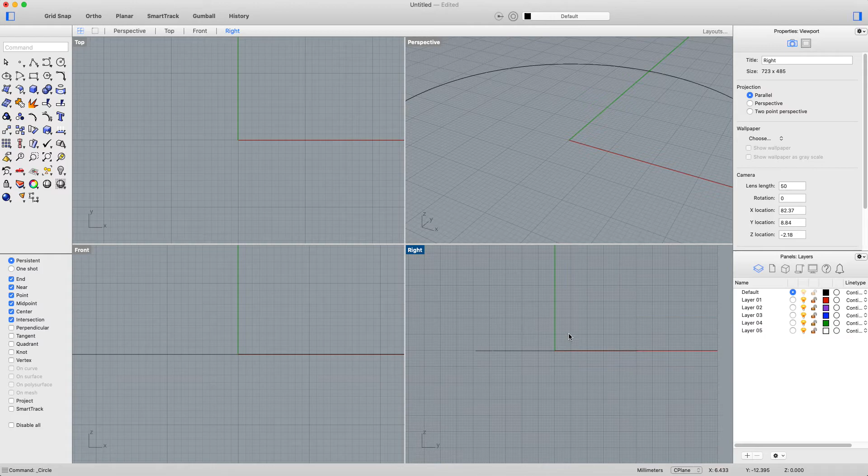So I'm going to start with a circle to give me my basic size. I'm going to draw it in the right hand view because it's the side of the wheel that I'm going to be drawing. And I'm going to draw my wheel at 100 millimeters big, so 100 millimeters diameter or 50 millimeters radius. Oops, that didn't work. Try that again. Okay, so there is the side of my wheel.

And what I want to do is create some spokes in this, and I also want to create a tire around the outside. So one of the tools that I'm going to use in this is called offset. Offset is moving a curve or a surface away from another curve or surface.

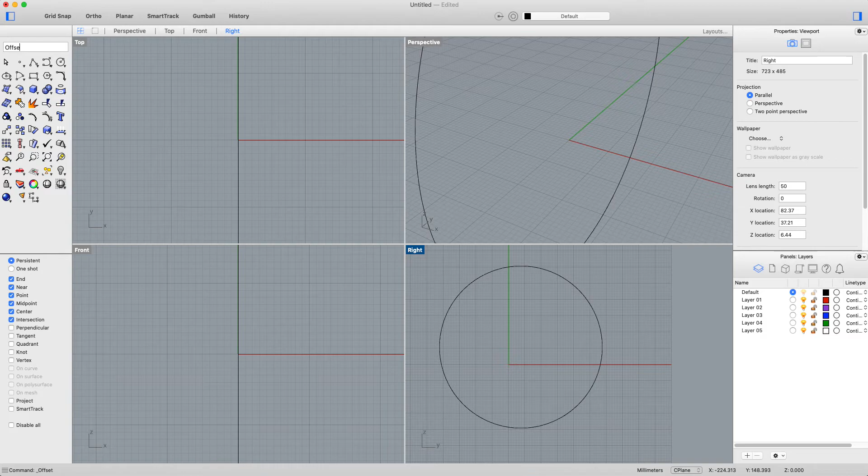Offset is in here, I think. Offset curve, okay, or you can just start writing offset, it will come up. Click the curve that you want to offset and then tell it how far you want to offset it. So I'm going to go for 5. You can see now when I move my mouse I can either offset the curve inside or outside. So I'm going to offset a curve inside to start with.

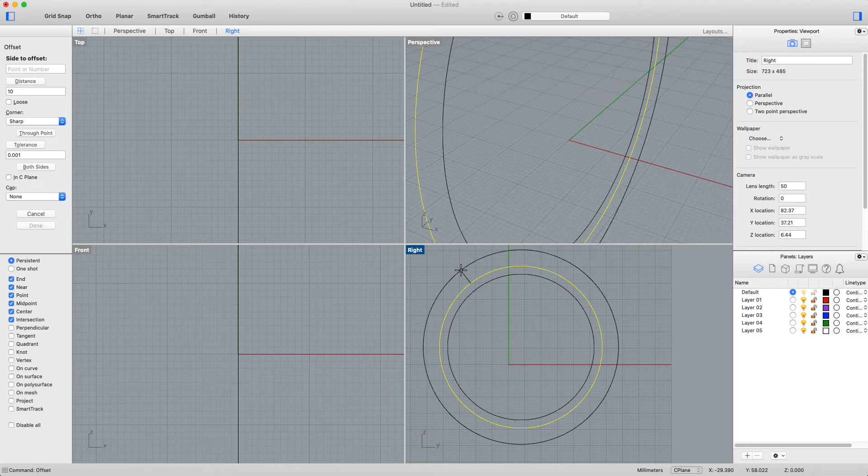So this is going to be the edge of my wheel. I'm then going to offset another curve out from here, which is going to be my tire. So I can either write offset again or I can just hit spacebar to repeat the last command. Spacebar, click here, and then I'm going to make my tire a little bit bigger. What does 10 look like? Nope.

Okay, so in between there and there is going to be my tire. In between there and there is going to be the outside of my rim. I also need a center of my rim. So I click here, I come down here, and if I move my mouse near the edge of the circle it bounces to the center. So I click, and I'm going to reckon that the inside of my wheel should be, say, that big. Then I need to draw some spokes in here to create a joining bit between the inside of my rim and the outside of my rim, which is between here and here.

So we can either draw a straight shape from the center of this, up, okay, and I can either have straight edges of my rim, which I'll show you first.

So once we have drawn one line, we come over here and we find this tool here, which is an array tool. If you click and hold, there is either rectangular array or polar array. So what we're doing is a polar array, which is spreading objects around a pole, like the North or the South Pole. The pole in this case is the center of your rim.

So you click this, and it asks you for the center. Well, sorry, I should deselect everything first. If I click this, it asks for the object that you want to array. So this is the object that you want to array. Press enter, and then it asks you for the center of the array, which is here.

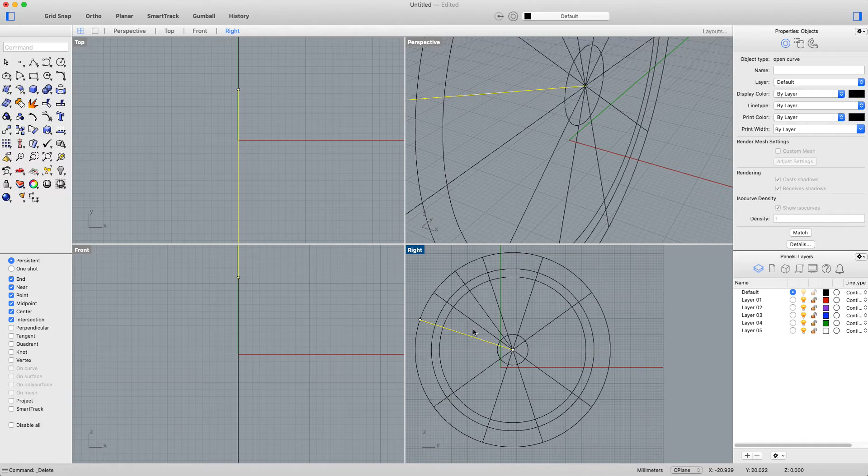What I would then need to do is go ahead and delete the ones that I don't want. So this is one of my pieces. I'm going to delete every second one, all the way around my circle. Okay, so then I would be able to create a wheel using this shape.

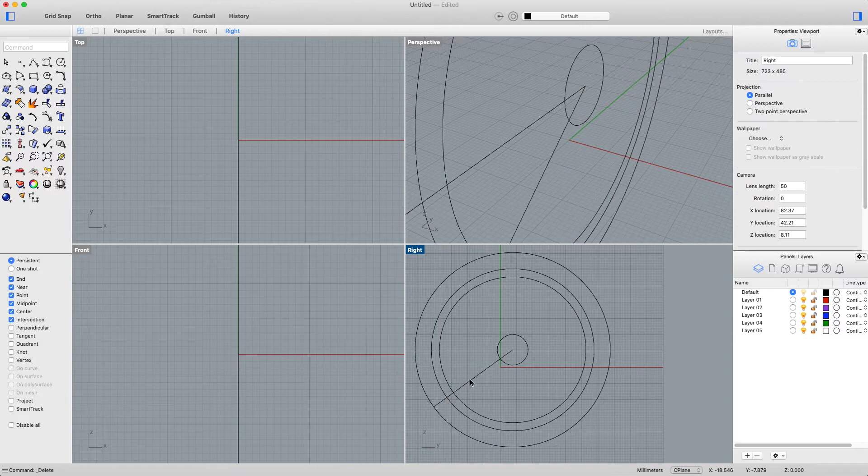I'm going to try and make it curvy, make it a little bit more interesting. So instead of doing straight edges, what I'm going to do is get rid of all of this, and I'm going to draw one curved line.

Using this tool here. I'm going to start in the center, click out here, and then click. I'm going to hold down Alt because I don't want it to bounce on things. So I'm going to give it a bit of a shape like that. Okay, it doesn't matter that it's a bit long, we'll fix that later.

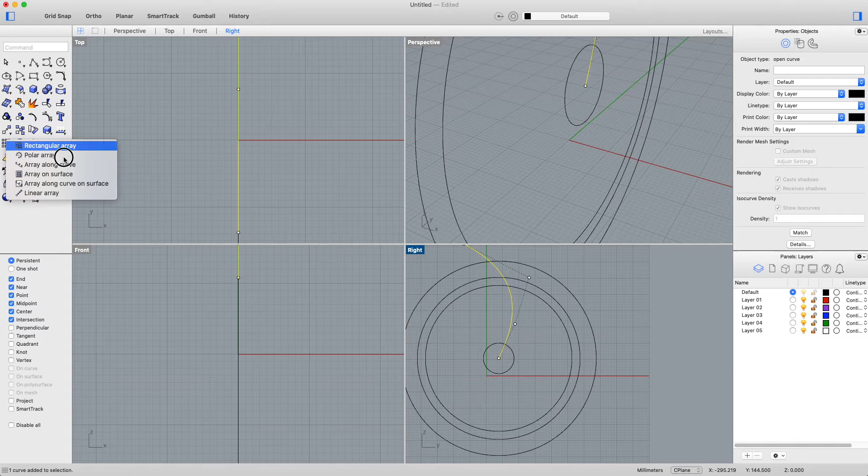Then I'm going to get this and I'm going to array it, and do 20. Wow, that's pretty intense. So we actually only need to draw one part of this rim, and then we can...

Oh no, we're going to do it the long way. So I'm going to get rid of all of these.

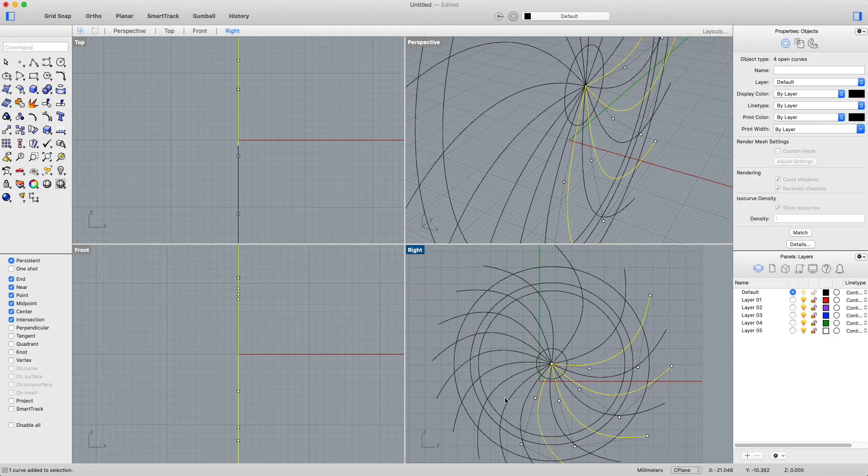Okay, so this is going to be solid, this is not going to be there, solid, not there, and so on. We need to create the surface coming out from here, round, and back into here. So what we need to do is split this guy.

Split is not there... split must be in here. My gosh, I can't remember where it is. We're just going to write split. Okay, split, and we want to split this, with all of these shapes in here. Press enter when you're done, then select all of these.

I don't want that piece, that piece, that piece, that piece, or that piece. So my rim is going to come up through here, round here, back in here. Then I have to get all of these, and split these as well. Split, and I want to split it with all of these shapes.

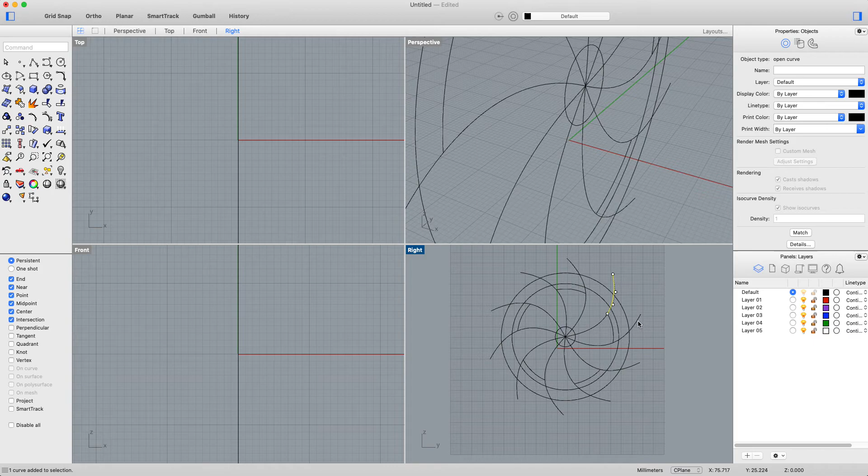Now I have a bunch of shapes, and I need to delete all these ones. My wheel's starting to take shape. So the rim comes in here, and then it needs to go across here and back out here. Same as what I did with the outside, I need to split the shape

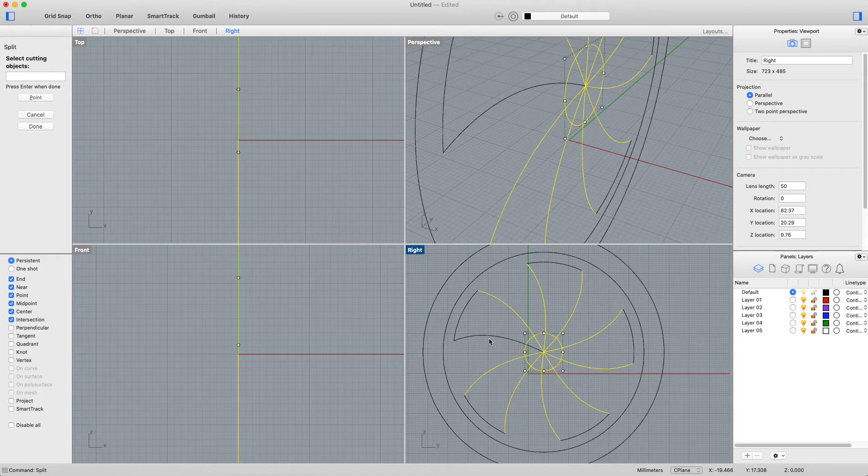with all of these. And I need to get rid of this, this, this, this, and this. We're nearly there. Then I need to split these shapes.

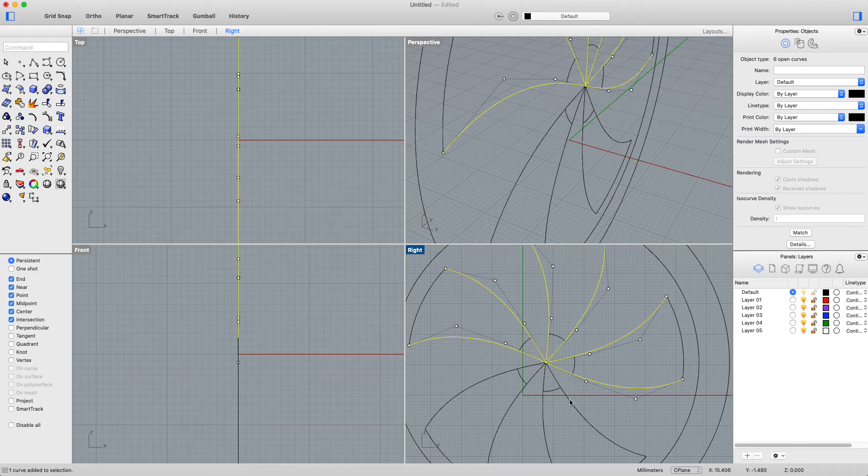It's probably easier if I make this a bit bigger for you, isn't it? So I get all of these shapes, and cut with these shapes. All of this stuff in the middle I delete. And so now I have this rim in here.

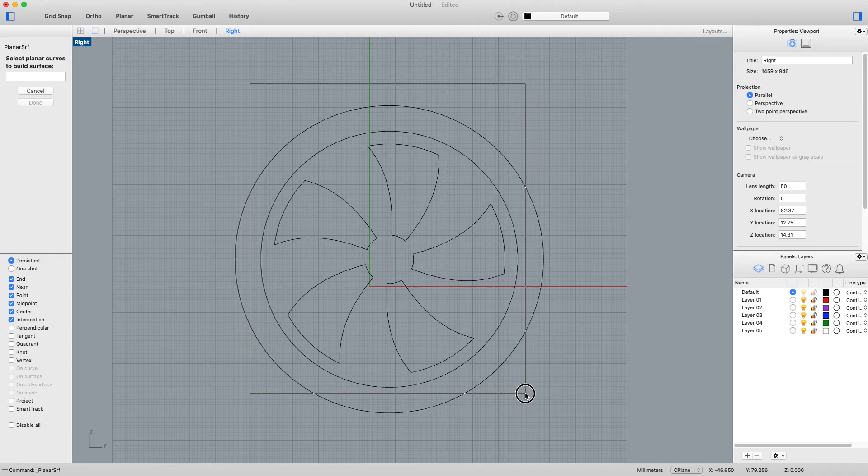That was an awful lot of splitting we needed to do. But now that I've got this all made, I can make my planar surface, which is what we did in the last video. I just have to be careful which curves I select. I want to select everything apart from this shape out here, so I'll drag a box carefully so I don't get that outside circle. Press enter. If I minimize this.

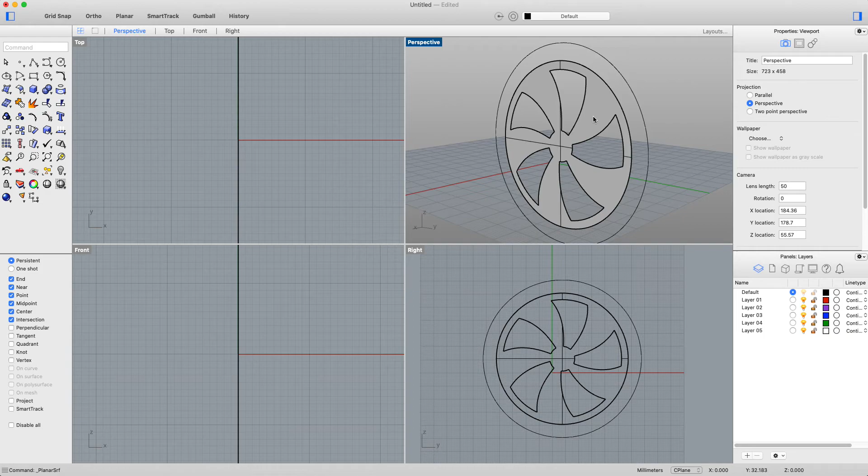Turn shaded on, so you can see that I have a rim drawn in here. I'm going to push this out sideways to make it thick, so I'm going to extrude this. I'm not going to extrude it very far because I don't want my rim to be too thick. So I now have the rim here.

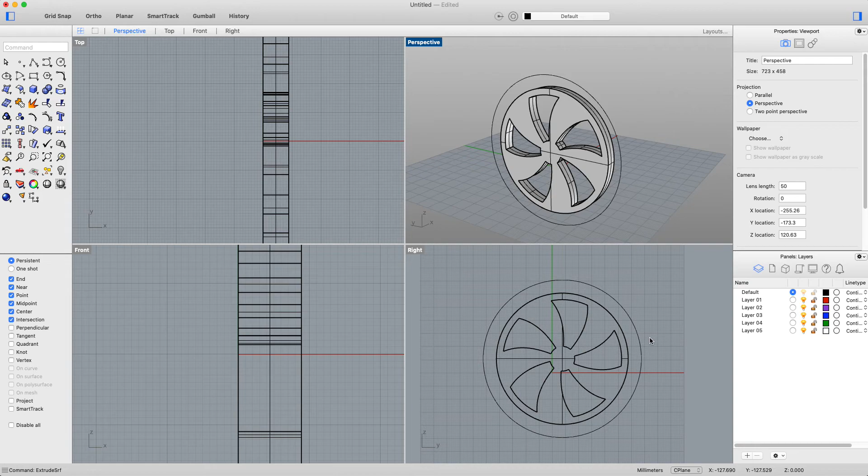Then I need to draw the tire. I need to draw a planar surface for the tire. I'm going to turn this shape off for a bit so we can see what we're doing more easily. I moved it to another layer and turned the layer off. I don't need this planar surface anymore, so I'm going to delete it.

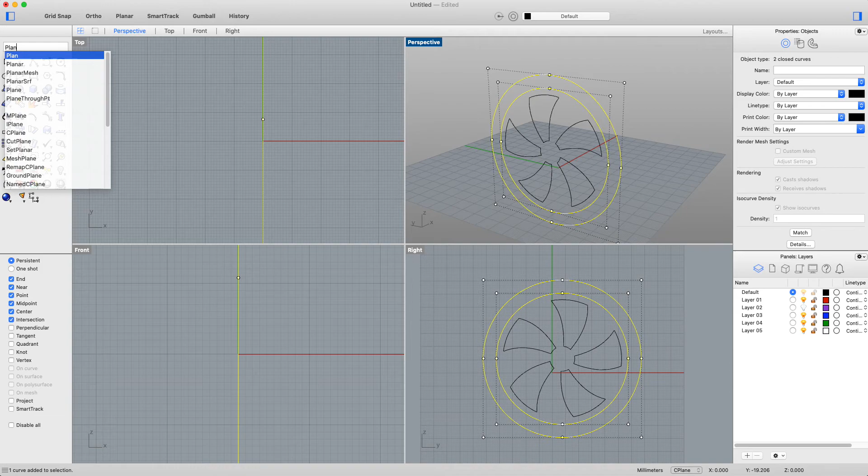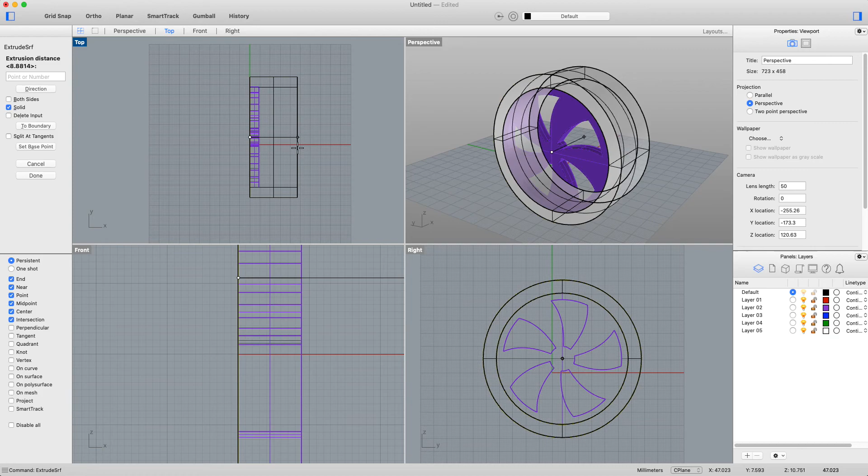Then I'm going to make a planar surface between these two shapes. I'm just going to write planar surface. Okay, then I have the edge of my tire. I'll turn this back on to see how far I want to push it. Extrude surface. Obviously I want my tire to go a little further than my rim, about that far.

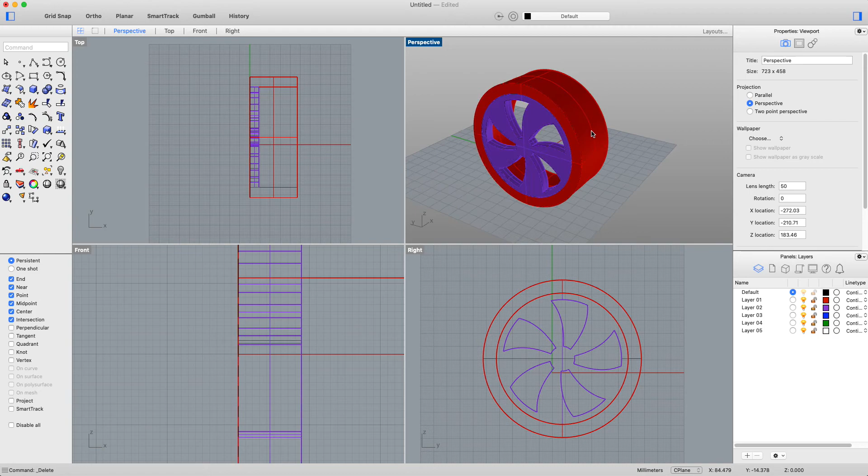I'll put this on a different layer so you can see it. Turn that off for a second. Delete this, don't need that. Turn my red one back on. Then I have a nice tire and a rim. Obviously, if I was going for full realism, I would need to draw the rim coming inside this side of the tire, but I don't think for what you guys are doing you need to do that at the moment.

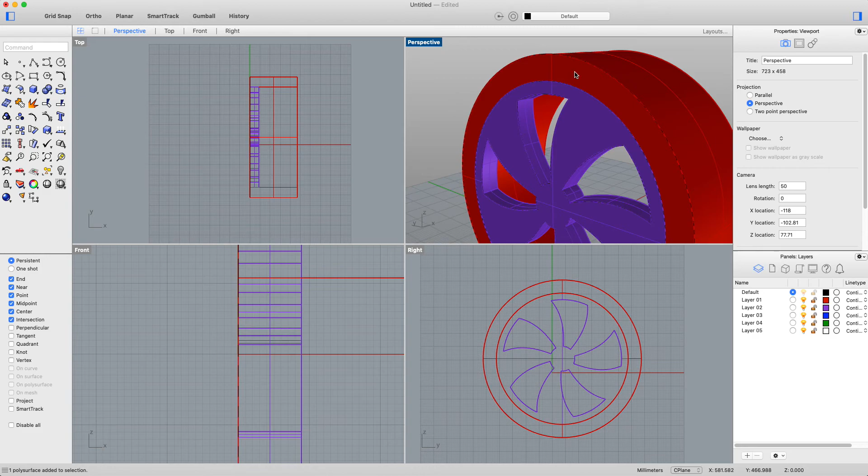One last thing you could do: normally a shape doesn't exist with a hard corner like this on the edge, so you can what's called fillet the edge of an object. In the solid editing tools, you can go to fillet edge, or just write fillet. There are a few different kinds of fillet, so this is fillet edge.

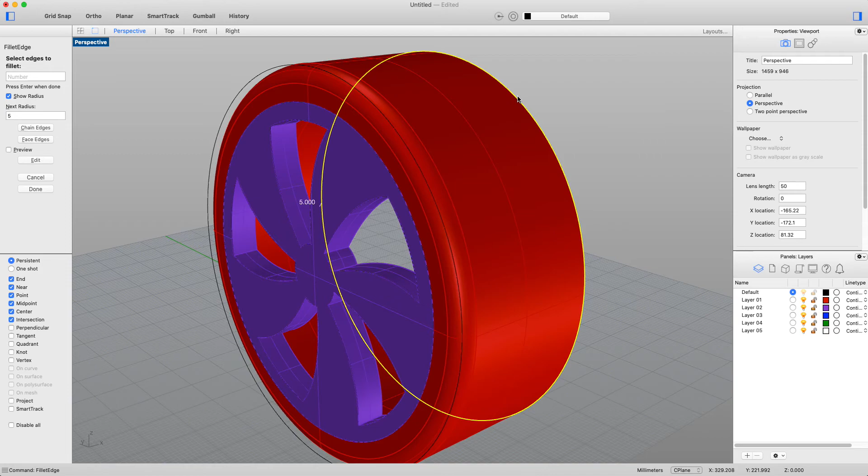You need to decide the radius, so I'll show you a reasonably large radius to start with. Then you click the edge, press enter again, and it smooths the edge of the tire. That actually looks about the right size. Then I can do spacebar to do it again, click the other side, and now I have a tire that's rounded at the edges.

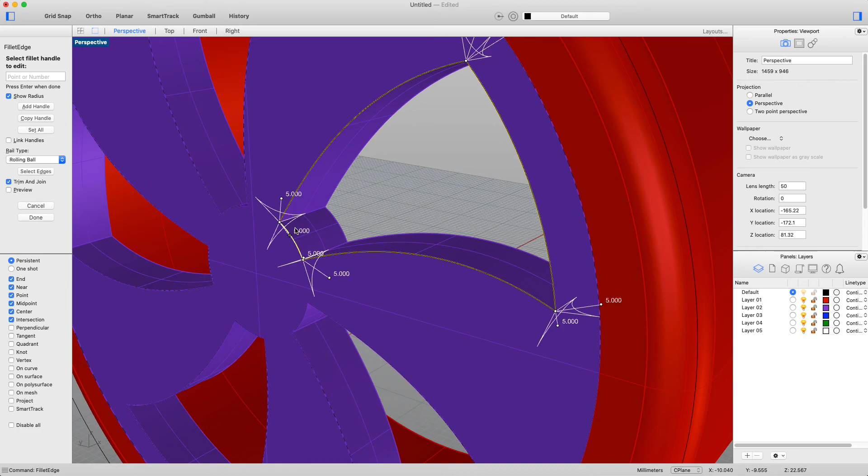You can also do that with the parts of your rim. Say I wanted to do this edge here. Now this may not work because 5 is quite big to get around this corner. So that's what it looks like when it doesn't work - that fillet was too big for it to work out.

So I'll change the fillet size, see if I can get it to work, down to 1, which is quite small. Click the edges, press enter. Okay, so it's smoothed those. Might be able to make that a little bit bigger, so change it to 2. Then I have smoothed the edge of that.

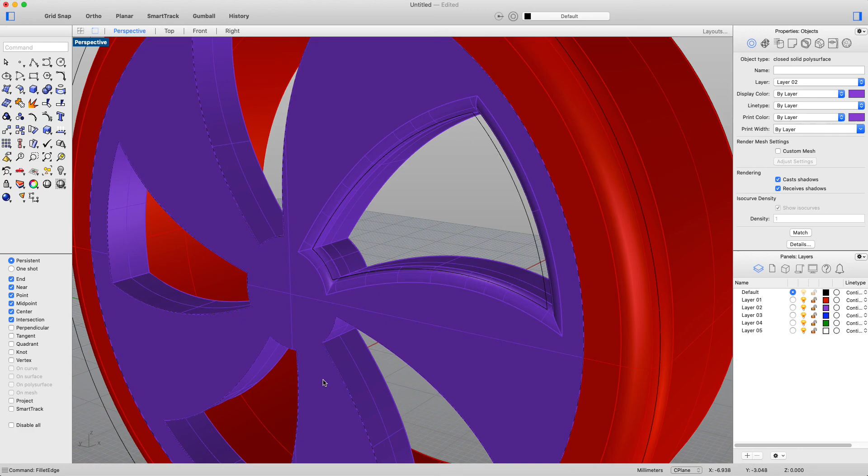I could then go around and do all the rest of them, and then I would end up with a nice smoothed wheel and tire. Okay, cool. Thanks everyone, see ya.